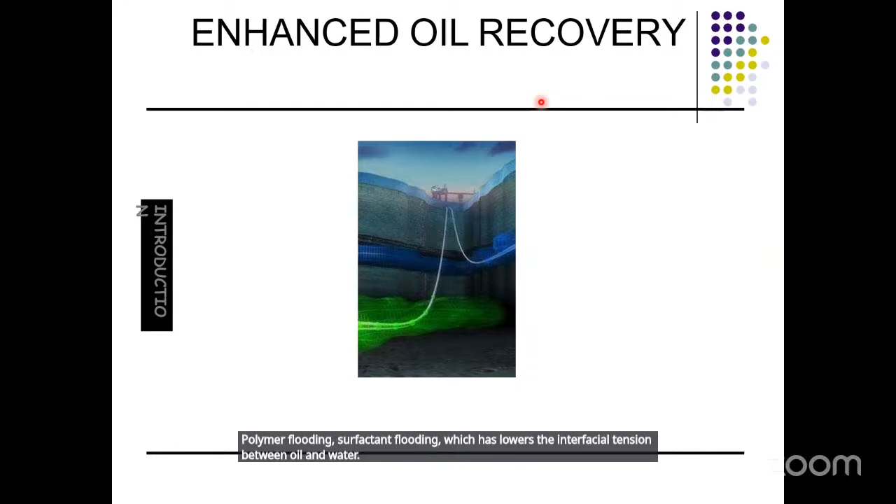For chemical injection: polymer flooding, which increases water viscosity to improve sweep efficiency. Surfactant flooding, which lowers the interfacial tension between oil and water. Alkaline surfactant polymer, which is a combination for maximum effect.

Also in our introduction, we talk about reservoir phase behavior and currently used EOR processes. For the EOR methods used to improve reservoir recovery and efficiency, explain the difference for each method, state whether it can improve displacement, vertical or areal sweep efficiency, and explain how it works.

For the factors affecting EOR selection, we have reservoir temperature and pressure, crude oil viscosity and composition, rock and fluid properties, economic considerations, and environmental regulations. The benefits of EOR: it increases oil recovery significantly, extends the life of mature fields, makes use of existing infrastructure, and some EOR methods like CO2 injection help reduce carbon emissions.

The challenges of EOR: high cost and operational complexity, environmental concerns, reservoir heterogeneity, and scaling and injectivity issues, especially in chemical EOR.

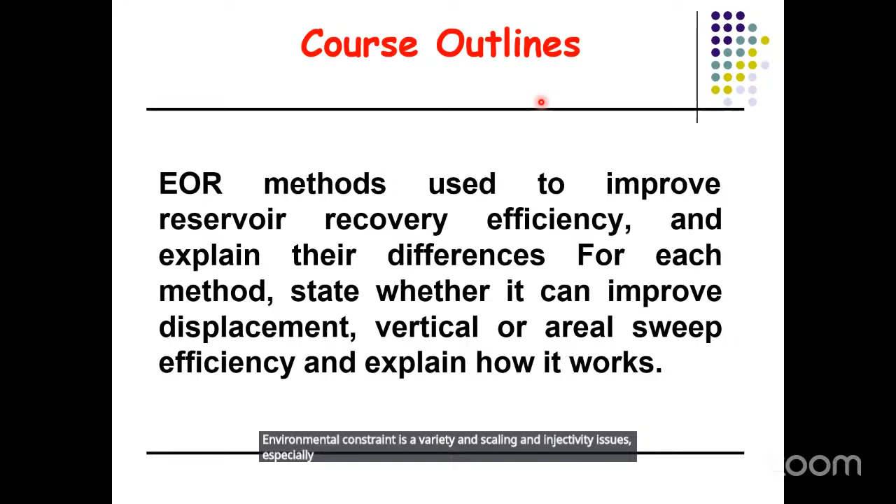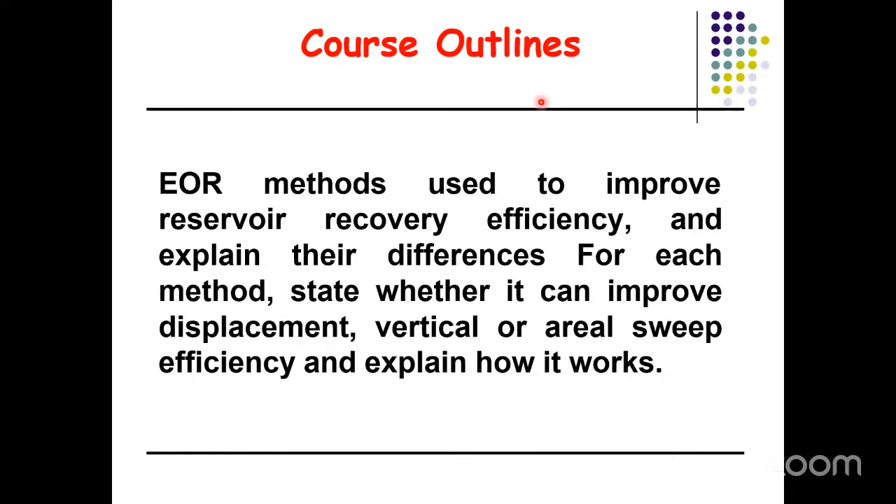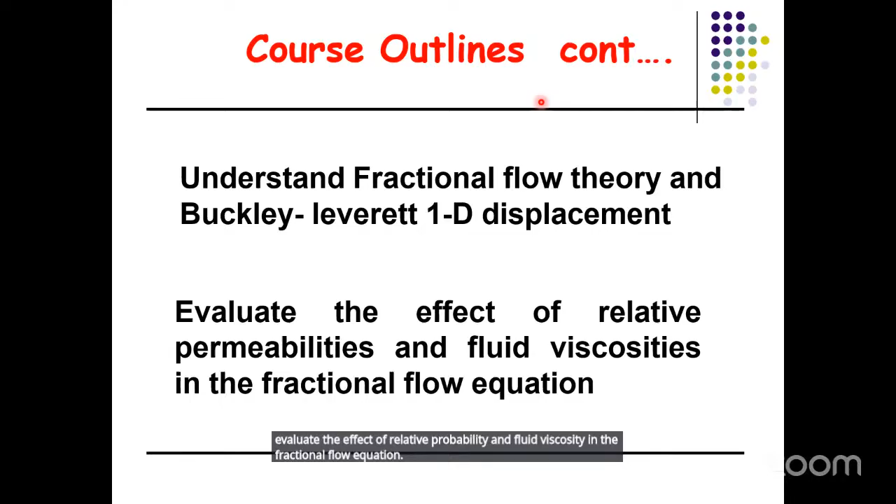The course outline continues with the screening criteria for enhanced oil recovery methods, understanding fractional flow theory and Buckley-Leverett 1D displacement to evaluate the effect of relative permeability and fluid viscosity in the fractional flow equation. Estimate oil recovery using Buckley-Leverett and Dykstra-Parsons methods, planning for water flooding.

So as an introduction to reserves, which are quantities of petroleum from known accumulations available for production, and quantities anticipated to become available within a practical time frame through additional field development, technological advances or exploration.

For reserves in the context of enhanced oil recovery, the focus shifts to how EOR technologies convert unrecoverable oil into recoverable reserves. So enhanced oil recovery not only increases the recovery factor, but also leads to reclassification of resources into proven or probable reserves.

Also the original oil in place, which is the total volume of oil estimated in the reservoir. Recovery factor: primary recovery is 10 to 20% of the original oil in place, secondary recovery is 20 to 40%, and EOR methods can increase the recovery factor to 50 to 70% or more, depending on the reservoir and the method.

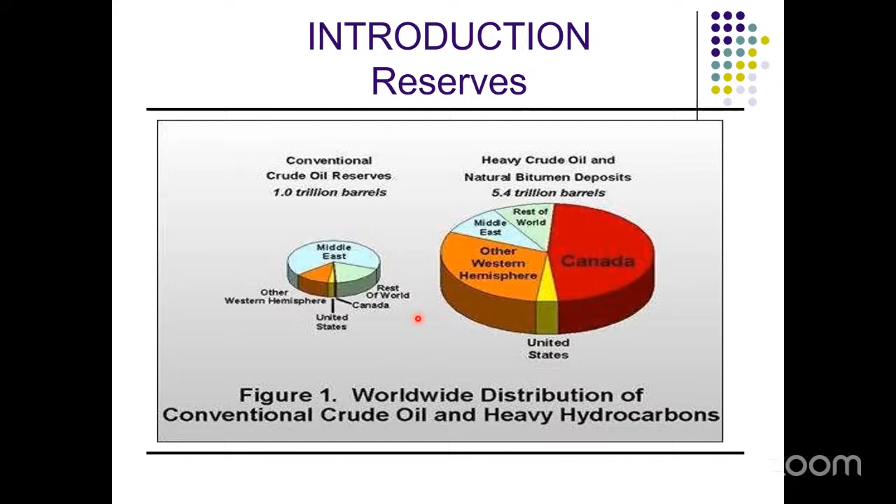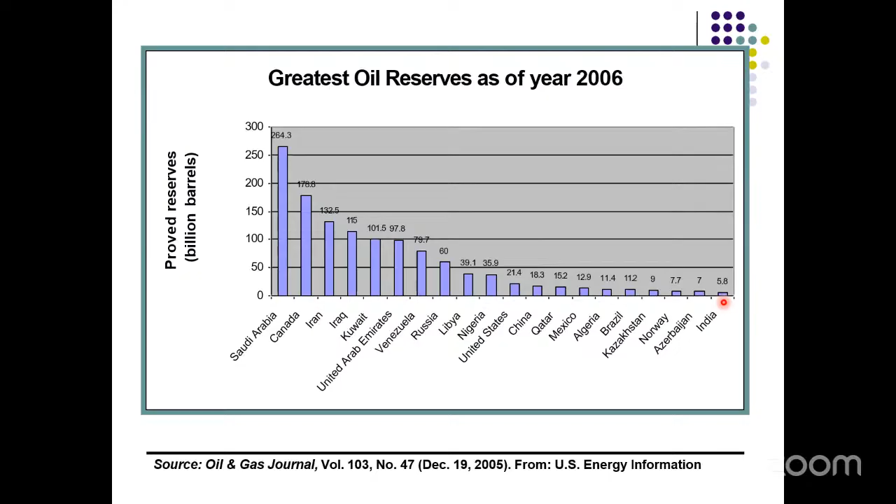Okay. This shows the greatest oil reserves as of the year 2006, the greatest one being Saudi Arabia, and the last one India, in proved reserves. Also, this shows the greatest gas reserves as of that year, with Russia having the most proved reserves, and the last one Kuwait.

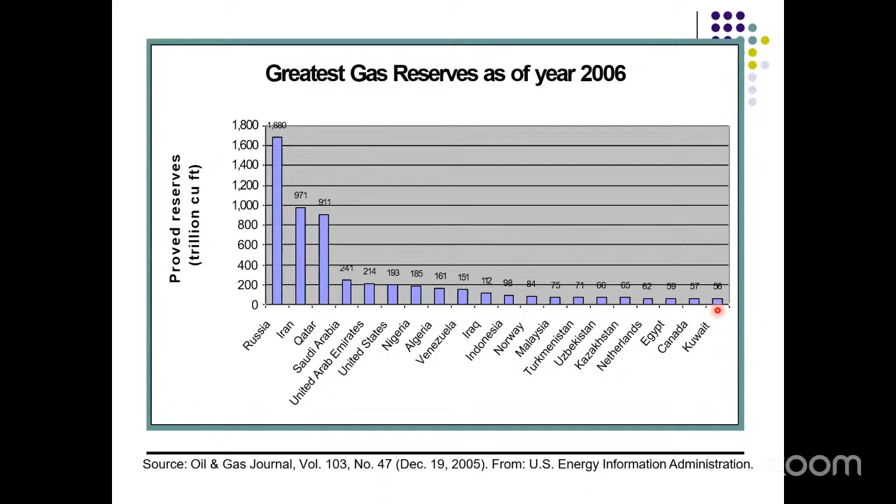Gas cap, where free gas in a gas cap expands, pushing oil downward. Water drive, where natural aquifer pressure pushes oil towards the well. Gravity drainage, where oil drains due to gravity from high to low zones. Combination drive, a mix of the solution gas drive, gas cap, water drive, and gravity drainage. As for the features, it is the lowest cost recovery phase and requires minimal surface facilities. Recovery factor is from 5 to 20% of original oil in place.

Secondary recovery involves adding energy to the natural system by injecting water to maintain pressure and displace oil, also known as water flood. It typically recovers from 25 to 45% of original oil in place after primary recovery, with an average of 32%. Common secondary recovery methods include water flooding, which injects water into the reservoir to displace oil towards production, and is cost-effective and widely used. Gas injection injects gas, helps maintain pressure and improves sweep efficiency.

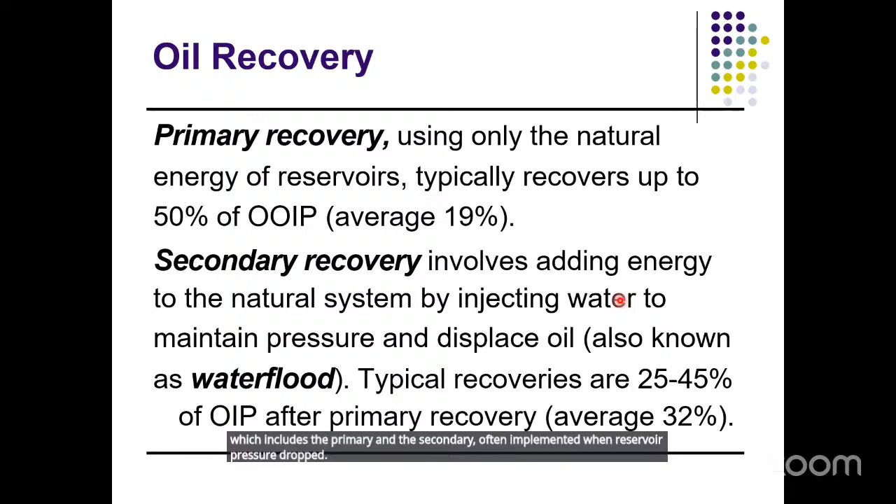Tertiary recovery includes all other methods used to increase the amount of oil recovered, typically recovering from 5 to 20% of original oil in place after primary and secondary recovery. Secondary and tertiary recovery are together referred to as enhanced oil recovery. Tertiary recovery refers to advanced methods used after primary and secondary recovery to extract residual oil that remains trapped in the reservoir. These methods alter properties of the oil or the reservoir to mobilize more hydrocarbons.

Among the main types of enhanced oil recovery, we have thermal recovery, which injects heat to reduce oil viscosity, best for heavy oil reservoirs, and gas injection EOR, which injects gases that mix with or swell oil, improving mobility; gases used are CO2, natural gas, or nitrogen. As for types, we have miscible and immiscible. Miscible means the gas mixes completely with the oil, and immiscible means the gas displaces oil without mixing.

Chemical EOR injects chemicals to reduce interfacial tension, improve sweep, or increase water viscosity. Polymers thicken water to improve sweep efficiency, surfactants lower surface tension to mobilize oil, and alkali reacts with oil to form in situ soap. Challenges in tertiary recovery include high cost, complex reservoir behavior, and waste handling and emissions, except in CO2 storage.

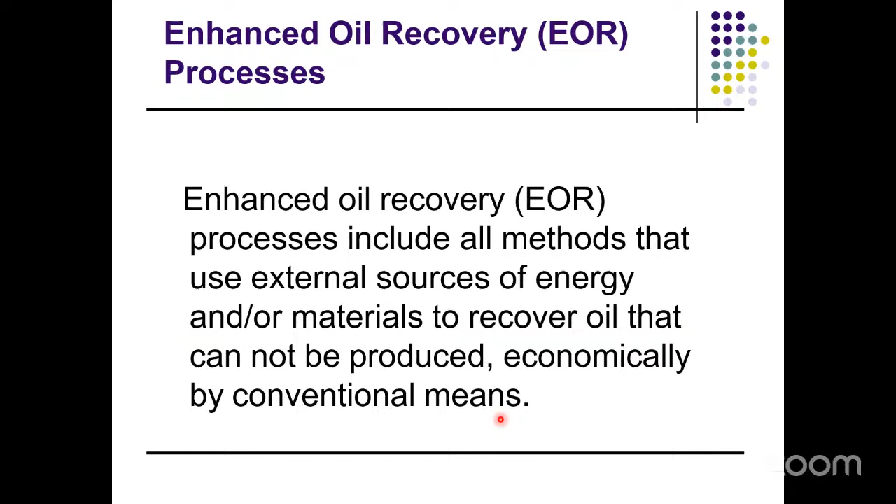Water flooding is an enhanced oil recovery method where water is injected into the reservoir to maintain or increase reservoir pressure and displace oil toward producing wells, improving oil recovery beyond primary production. The advantages of water flooding are increased recovery, relatively low cost secondary recovery, and it's simple to operate and monitor.

Also, we have the thermal methods, like steam stimulation, steam flooding, hot water drive, and in situ combustion. Chemical methods, like polymer, surfactant, and micellar polymer flooding. Miscible methods, including gases like hydrocarbon gas, CO2, nitrogen, and flue gas.

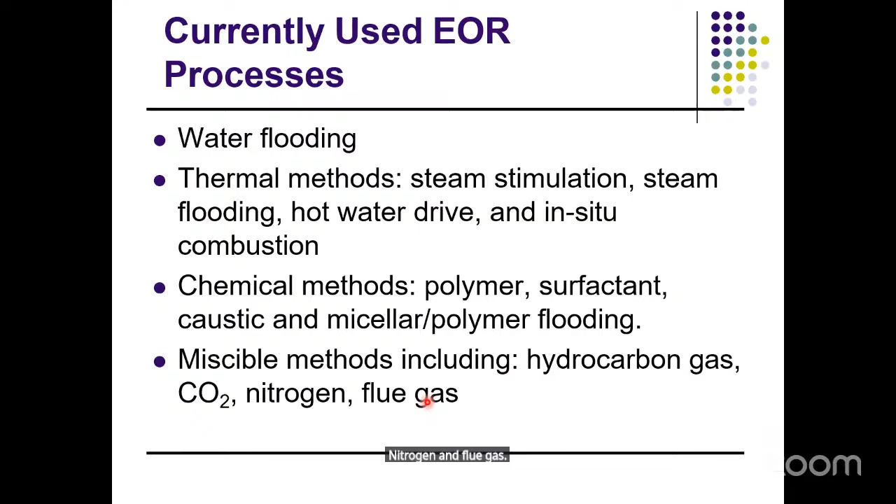Okay. So for the phase behavior, any fluid can exist in vapor, liquid, or solid phase depending on the conditions to which it is subjected. So solid, liquid, and gaseous phases of matter exist in different states depending on the values of pressure and temperature. Okay.

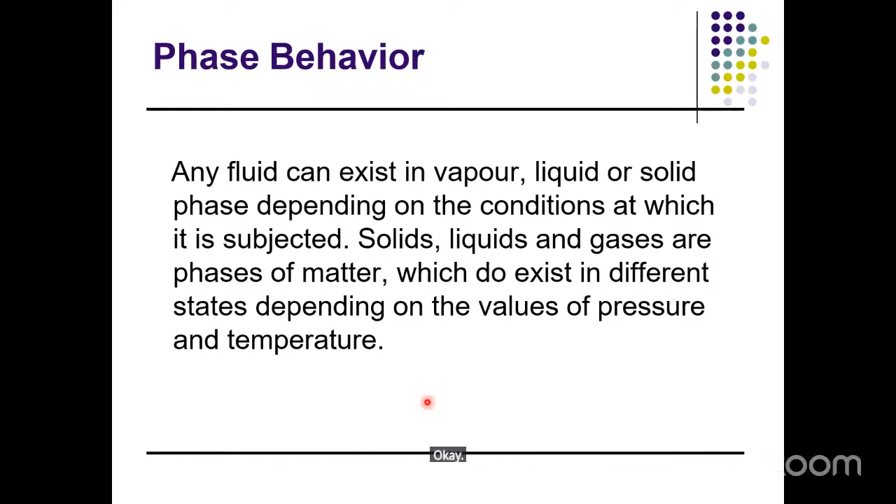For the phase behavior, we have the non-volatile oil, which is the black oil, a liquid crude oil with a low solution gas oil ratio that mostly remains liquid under reservoir conditions, with low gas content dissolved in oil. So gas is mainly produced as free gas during pressure drop. Its API gravity, American Petroleum Institute, is from 20 to 35 degrees, widely found in many conventional reservoirs.

And the volatile oil is a crude oil with a higher gas oil ratio than black oil. Under reservoir conditions, it behaves more like oil but with gas dissolved. It has higher API gravity than black oil, usually more than 35 degrees, more gas dissolved in oil, and exhibits properties between black oil and retrograde condensate gas. Oil can vaporize the gas at surface conditions.

For the condensate oil, actually known as retrograde condensate gas, it is a gas reservoir fluid where condensate, a liquid hydrocarbon, forms when pressure falls below dew point in the reservoir. Initially in gas phase in the reservoir, condensate drops out inside the reservoir as pressure decreases during production. Liquid condensate remains in the reservoir, causing possible formation damage, loss of liquid hydrocarbon in the reservoir, and reduced condensate recovery if not managed well.

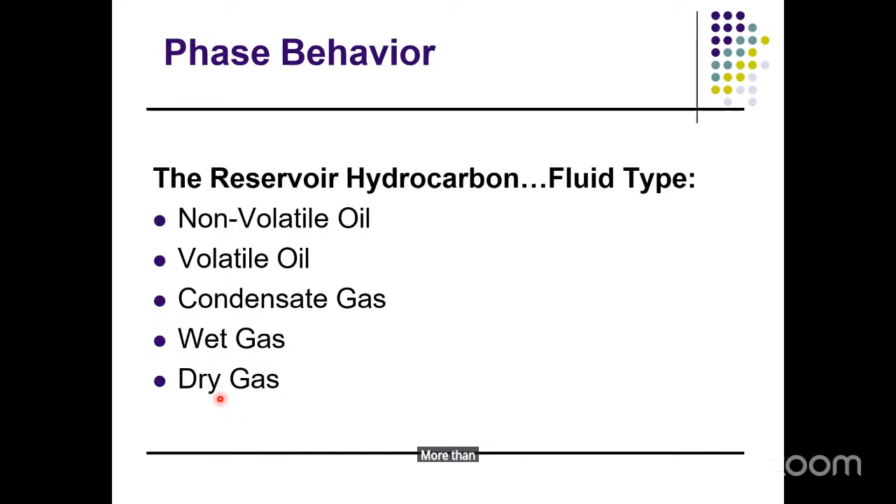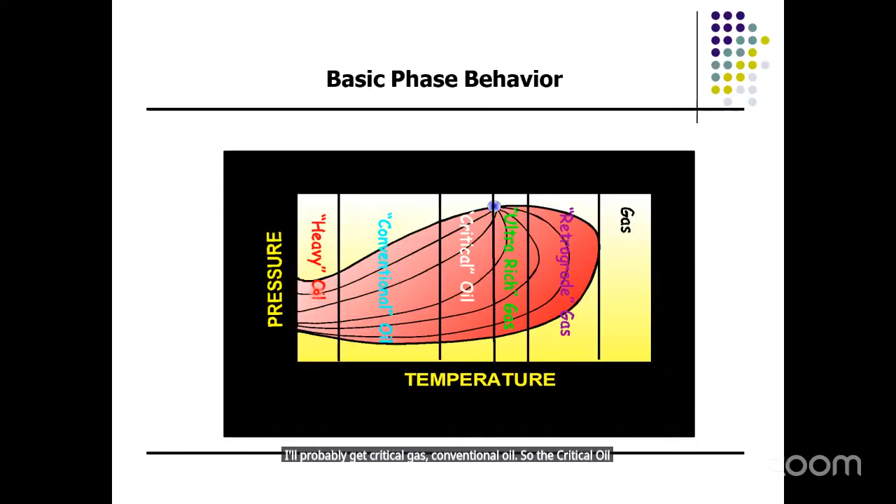Dry gas is natural gas containing almost no liquid or condensate, with very low heavier hydrocarbons like ethane or propane, no significant liquid hydrocarbon at surface conditions, and the gas oil ratio will be very high, more than 100,000 standard cubic feet per stock tank barrel. Also, this shows the phase behavior: gas, retrograde gas, ultra rich gas, critical oil, conventional oil, heavy oil, pressure versus temperature.

For the phase behavior, wet gas has a gas oil ratio of 15 to 100,000, API gravity from 50 to 70, gas gravity 0.65 to 0.85. Condensate gas is from 3 to 15,000, with the same API gravity and gas gravity as wet gas. Volatile oil is 3,000, from 40 to 50 API gravity, with the same gas gravity.

Non-volatile oil is 100 to 2,500, from 30 to 40 API, 0.80 to 0.90 gas gravity. Gas oil ratio in the heavy oil is 0, API gravity from 10 to 30, and tar or bitumen is 0 in gas oil ratio and less than 10 API.

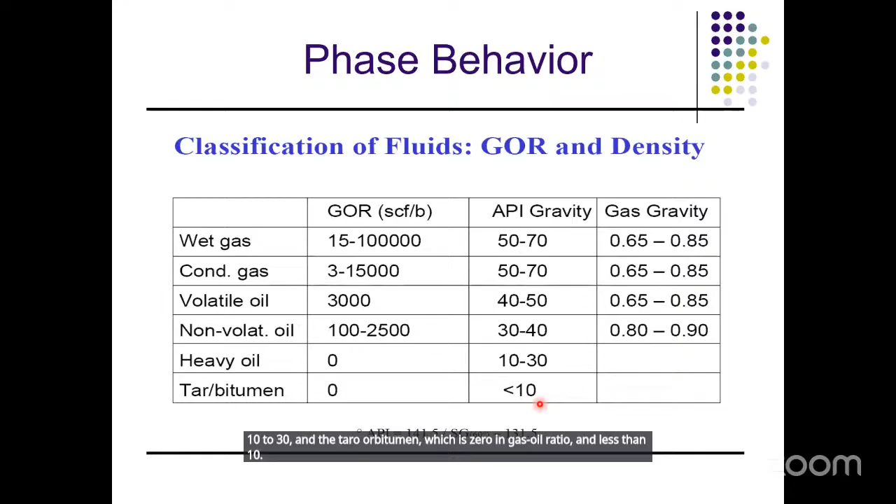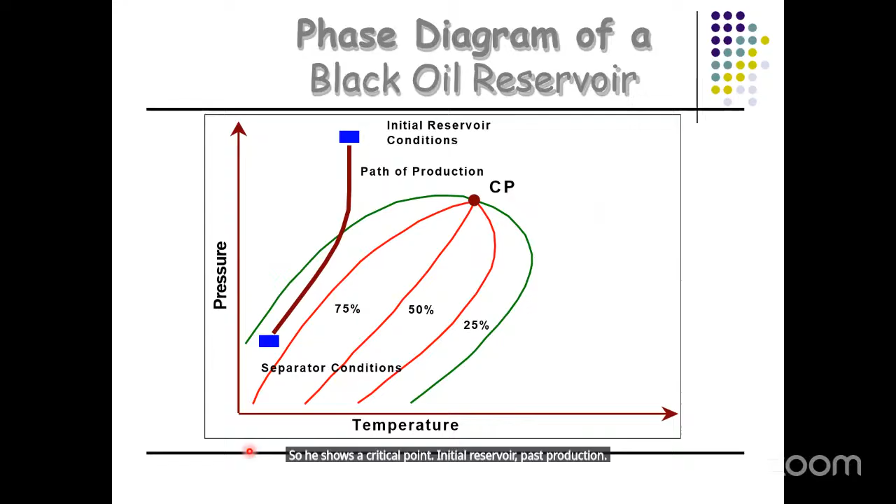So this shows the critical point, initial reservoir, path of production, separator condition, pressure versus the temperature. Dry gas, which is natural gas containing almost no liquid or condensate. So no significant liquid hydrocarbon at surface condition. Gas oil ratio very high, produced mainly as gas phase, with no liquid hydrocarbon to separate.

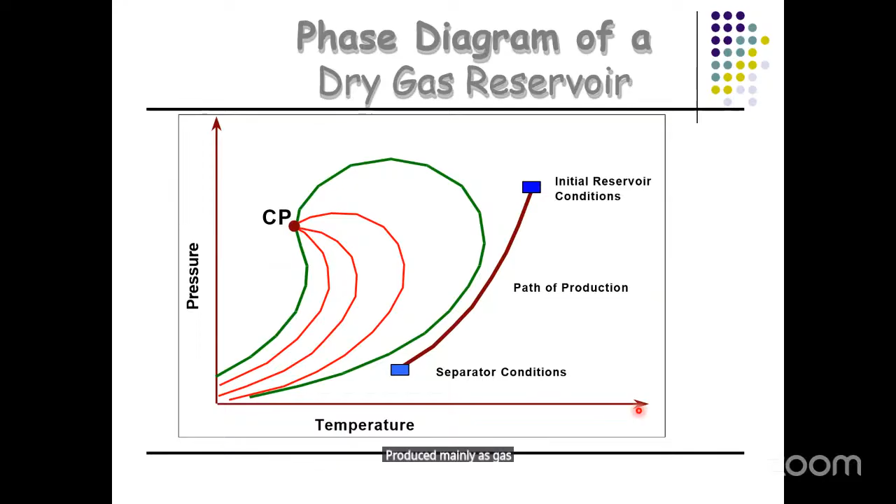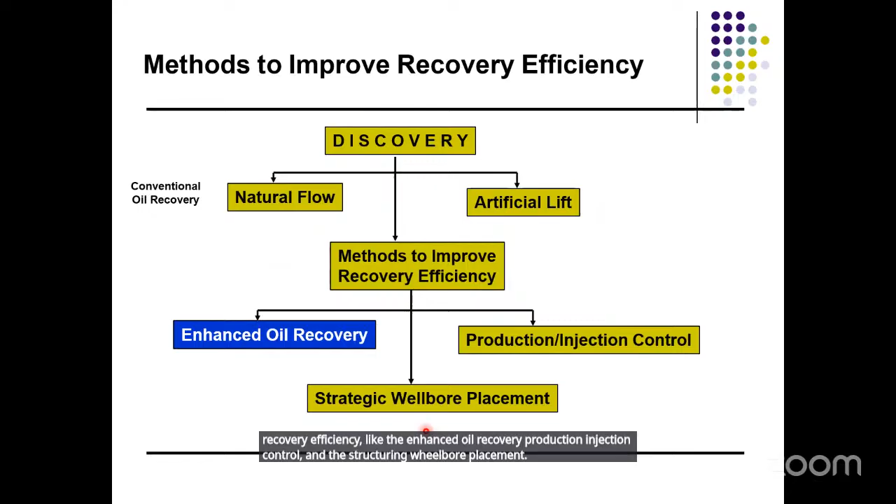Also, for methods to improve recovery efficiency, we talked about the discovery, which is we have the natural flow, which is for conventional oil recovery, artificial lift, methods to improve recovery efficiency like the enhanced oil recovery, production injection control, and the strategic wellbore placement. And thank you.